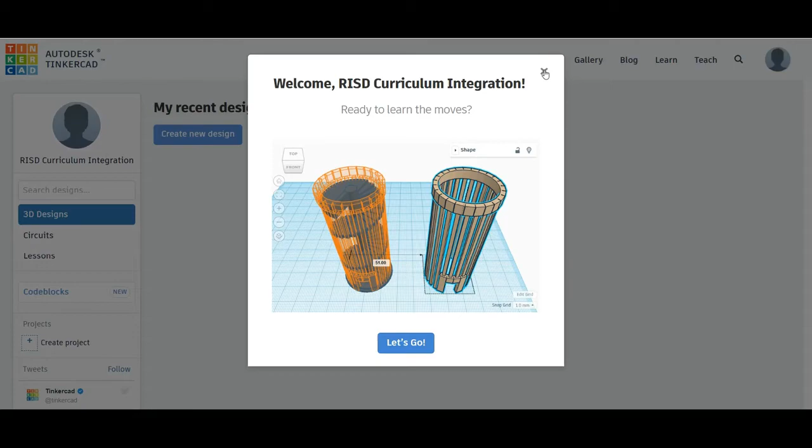Once I've done that, I'm going to come here to Google. Now, if this is your first time coming into Tinkercad, you're going to get this pop-up screen that's going to show you different things to do. We're going to go ahead and close that for right now, and we're going to move over here to where it says create new design.

We're going to come in here and just kind of explore. First thing we want to do is, up here, this is the title of our document. So I'm going to click on this, change it, and put our name so that we know what this project is and who it belongs to. So that'll be the store name.

We have a few different options over here. First thing we have is we can click on to collaborate. When we have the person with the plus, we're going to generate a new link, and this link right here we're going to copy. So post this link, and this will allow us to eventually print out your project.

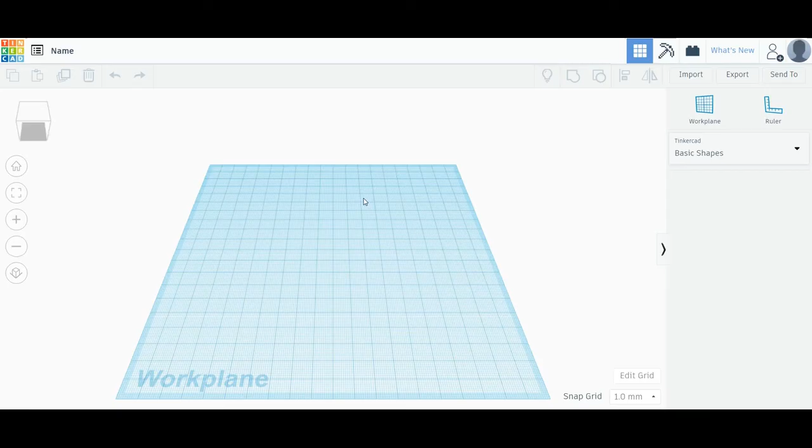Okay, now I have my work plane here, and so I have a few different options. Whenever I want to change my angle, I can look from the top, from the side, back, or even underneath. Okay, if I ever want to go back to the original view, I'll click home, and it'll take me right there.

I can also click and move this around using my touchpad or mouse. I can also zoom in or zoom out. I can adjust to a set setting if I want.

Now I'm going to move over here, and I have my basic shapes through Tinkercad. A box, and this will be a transparent box or transparent cylinder. This will be a solid color box, and I have all these different options available here to me. I have text right here and scribble, which we'll look at in a second.

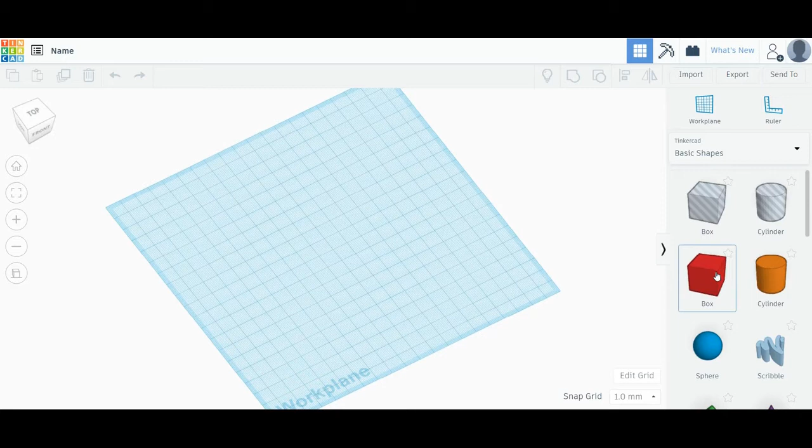So I'm going to click a box, drag it over here to my work plane, and adjust my angle to home. I'm going to look at it in front. So I see right now I have a bunch of different boxes.

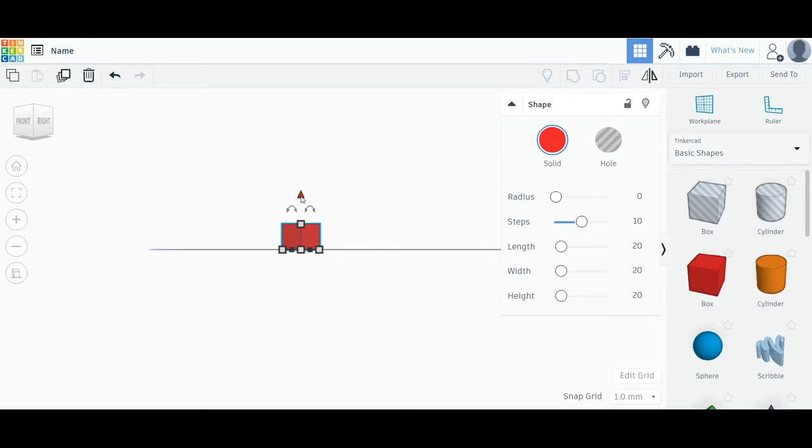I'm going to start by looking at this black cone up here at the top. Whenever I highlight over it, it turns red. And this, what it does, is allows me to drop above or below my work plane. Whatever is below the work plane won't be printed.

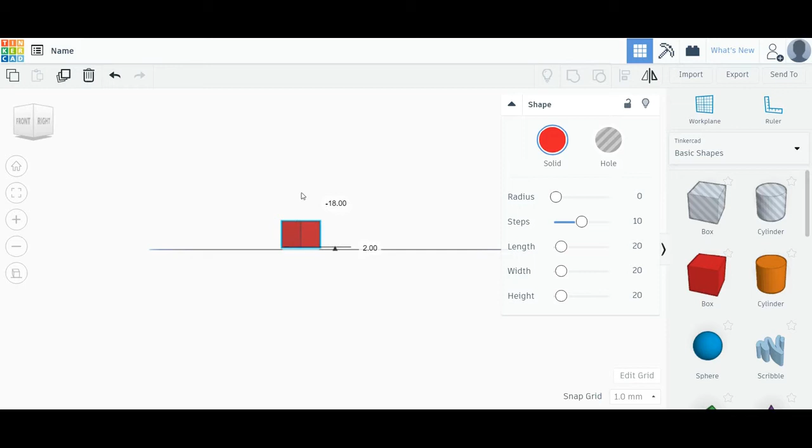Another thing we need to keep in mind is right now this image is floating. This is not going to print if it's not on the work plane. So we need to be sure that whenever we're working, we have it directly on the work plane. So once it's all at zeros, I'm good to go.

So now I have a bunch of different boxes. We talked about this—it moves the object up and down. If I want to increase the size, right now it's a height of 20, I can move it up or I can move it lower. If I want to extend the width of it, I click on a corner white box and adjust it as necessary.

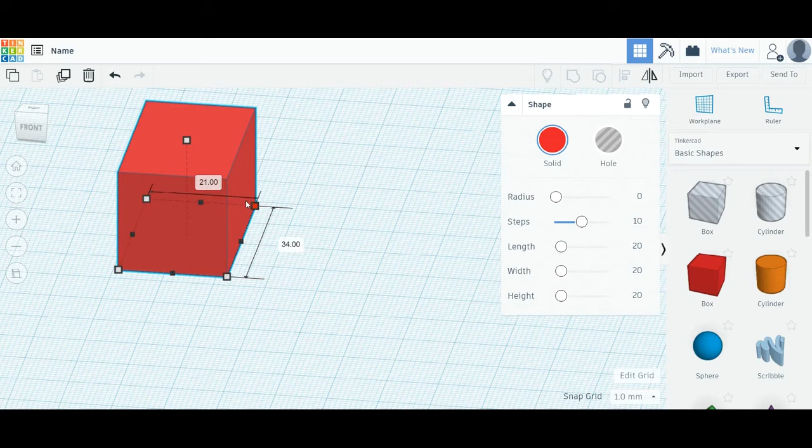So right now I want to move it down to about 15, and then I can change the color, which will be necessary as you have different images that you're going to include. I can add another image, and my encouragement to you is when you're adding another image, make sure you change the color. It will help you know the difference between the two, because whenever one is on top of another, it will look like it's being swallowed in quicksand.

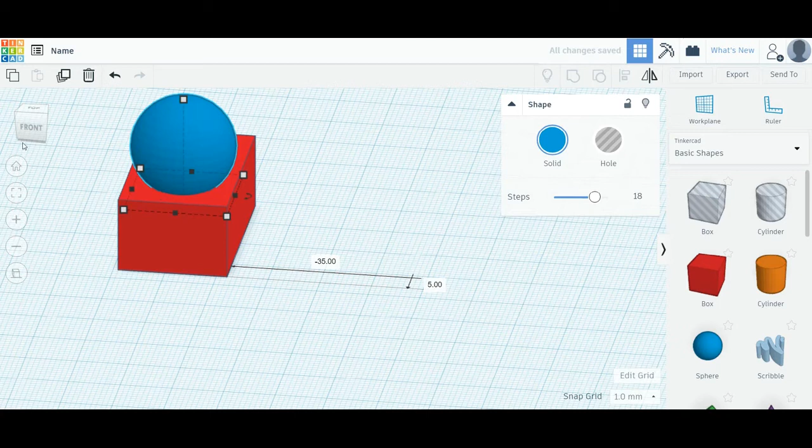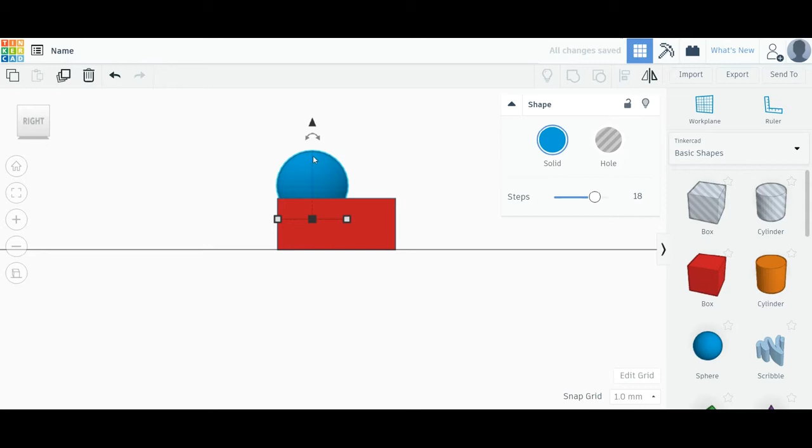I'll change my angle so I can see it a little better. I can come up here to my cone, shrink it down and move it over as necessary. I'll change my other angle. I see I'm not centered, so I can move it over, or I could just resize my red box if I have it set the way I want. Changing my angle again, it's back to where I want it.

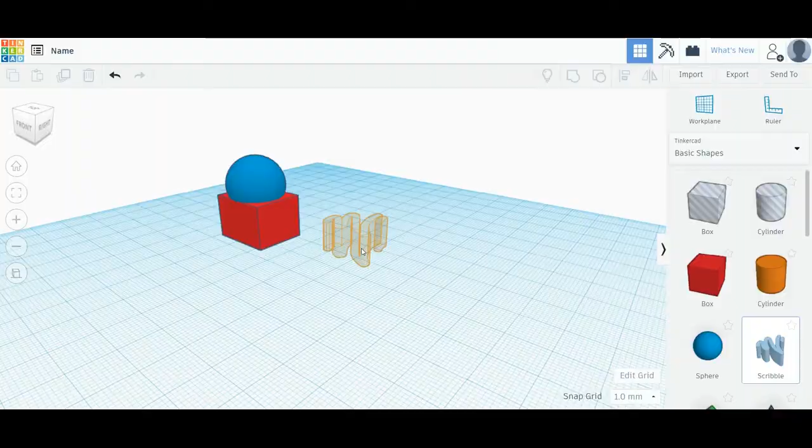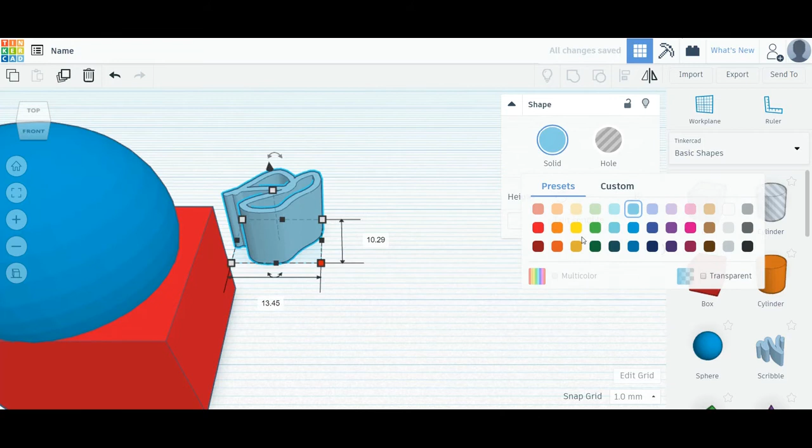I can come over here and click on scribble, and once I've created a design I prefer, I'm going to come in here and create my squiggly lines. If I like it, I can click done, and now I have these squiggly lines. Remember what I said about wanting to make sure my coloring is different?

So I'm going to change that, adjust it like so, and add it into my box. Well, I messed up real quick, so I can go back to where it was, come back, click on it, and add it here to the side of my box.

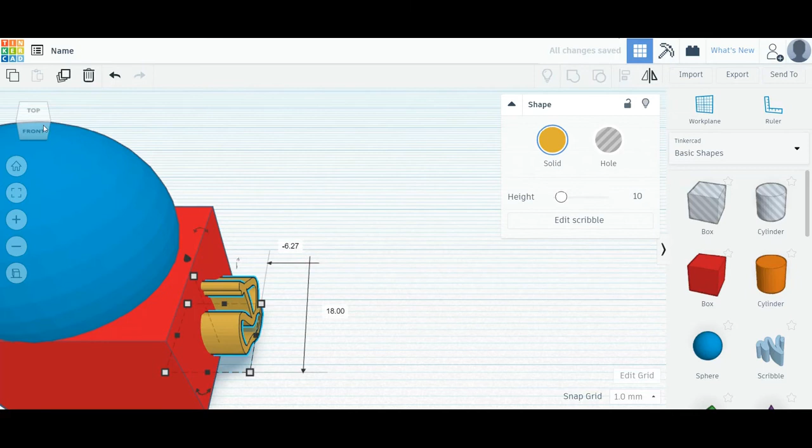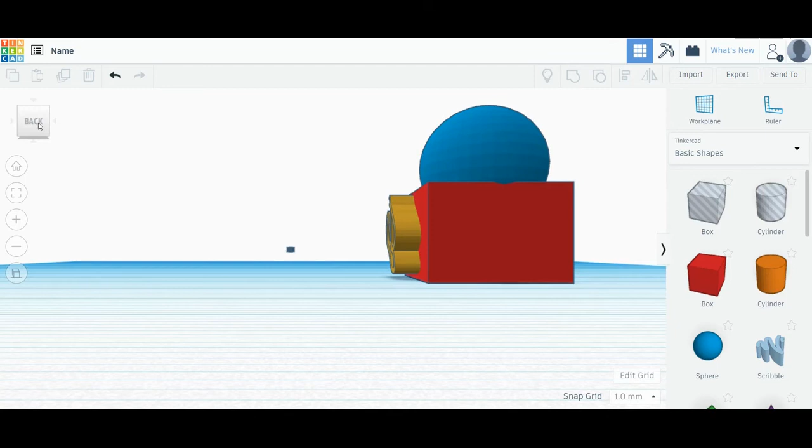Now it's a little bit off underneath the work plane, so I can click on it and move it as I choose. Remember, I can only change the height by the cone, so I'm just being reminded of that. Now it's set, nothing is floating, everything is directly on the work plane like it should be. I can zoom out if I need to, come up to the top, look at it as necessary, and return if I want.

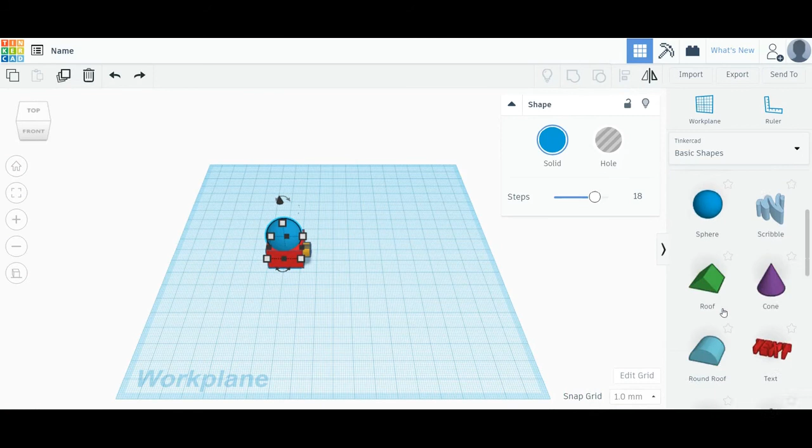Now let's go back home. If I want to add text, I'm going to drag my text over here, come over to this box, and type my text. Once I've typed it, I'm going to change again my coloring.

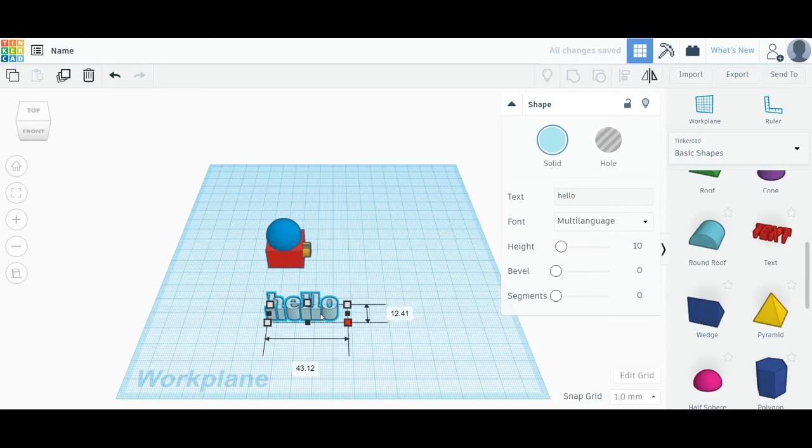I'm going to shrink it down, and now I may need to adjust it. I can adjust it this way, or go to the side, grab where I have the compass, turn it, and now I'm going to grab this compass and want to turn it up.

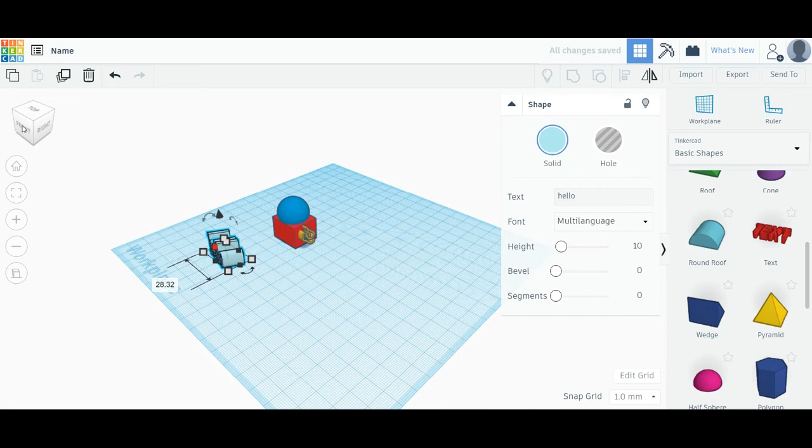And now if I'm happy with my size, I can come here and shrink it as necessary. I'm going to take it into the box if I want. Going back home gives me a better viewpoint, and I see it's still a little bit big for my box, so I'm going to adjust it down. So this I can put in here.

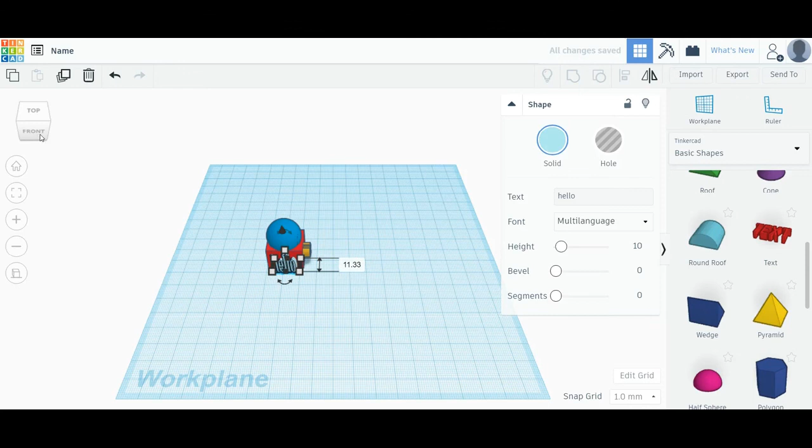It's still not completely flat, so I'm going to adjust it. Now I want to look at it from the front. Again, always change your angles so you can see the hello is a little bit below the workplane. So remember, we click on the cone and move up.

Okay, that's about it for Tinkercad.